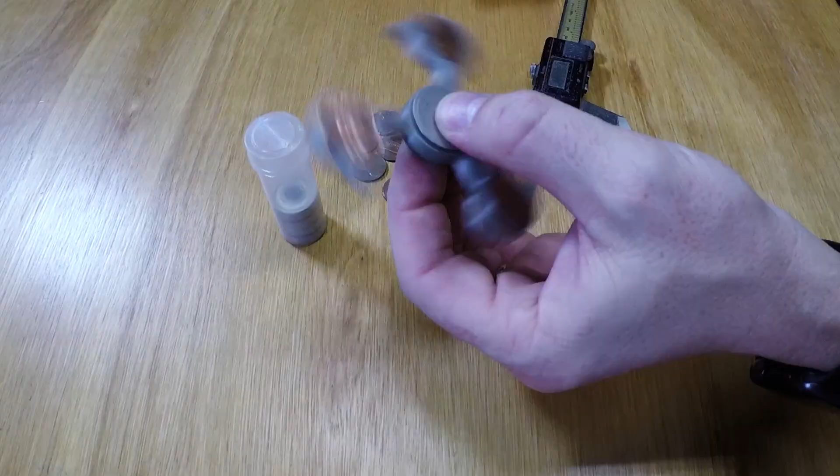And this definitely has that vibe to it because this fidget spinner right here is using coins. It uses 5 pennies in each arm for the weights. So it's not bearings and it's not nuts, it's coins. Pennies. I know not everybody has pennies, but you can use any coin if you want. It's just interesting. So that's cool.

But the other thing are these caps. This cap right here is locked into each other. And I got this idea because of 3D printing technology itself. 3D printing layers plastic, and there's those tiny little spaces in between the layers. And if one layer is stuck in the space of another layer, then it's almost like it is locked into place. Let me show you.

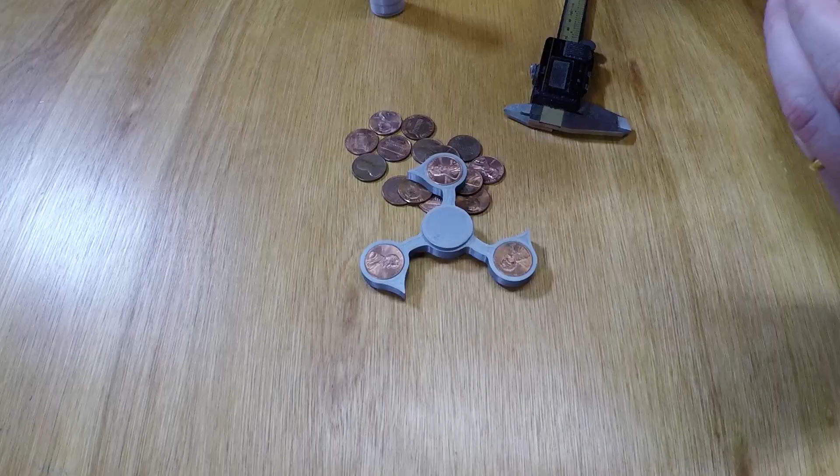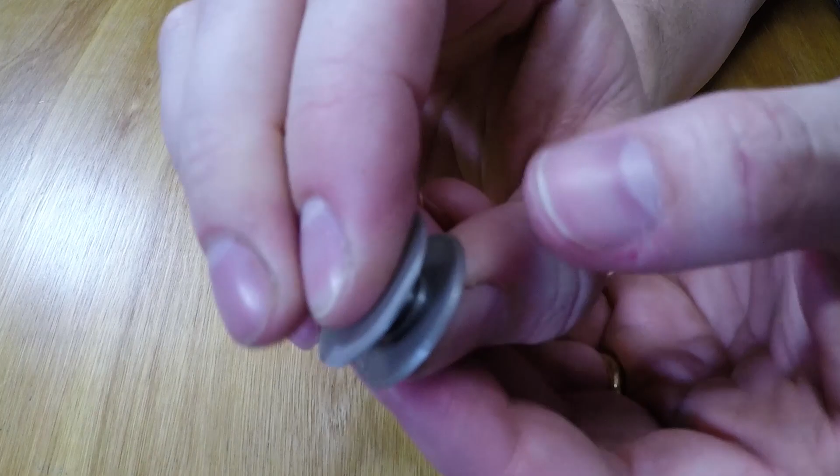So here are these two pieces. One has an innie and one's an outie, just like belly buttons. But because they're printed like this on the build plate, they have these tiny little layer inconsistencies. And if you put them together, you could almost hear it. There we go. And look, they are locked into place. This is not coming out easily.

And it's using this principle to put a cap on either side of this spinner, locking the cap through the bearing itself. It doesn't make for a better spinner, but it's a really cool thing that you can now apply to other things. You could technically make 2 pieces, one has a little hole and one has a little outie, and then when you put them together, they lock together. That's hopefully what you take from this, and you aren't necessarily using this to build another fidget spinner.

At the same time, I'm not going to judge you if you're building another fidget spinner because, I mean, I just built another fidget spinner, but it's all a ways to a means to an end, or whatever that saying is. So here's what I need to do: I need to show you how to make this in Fusion 360.

Making the fidget spinner itself with the coins is pretty easy. It follows the same tutorial as the bearings itself. You just stack them in there, and because they're kind of all squished into place, they don't fall out. That's what that is. But regardless, let's do this, and let's show you how to make some cool stuff in Fusion. I'm gonna kind of rush through creating the fidget spinner with the coins because it's very similar to the tutorial I did to use the bearings. So let's just get started with that.

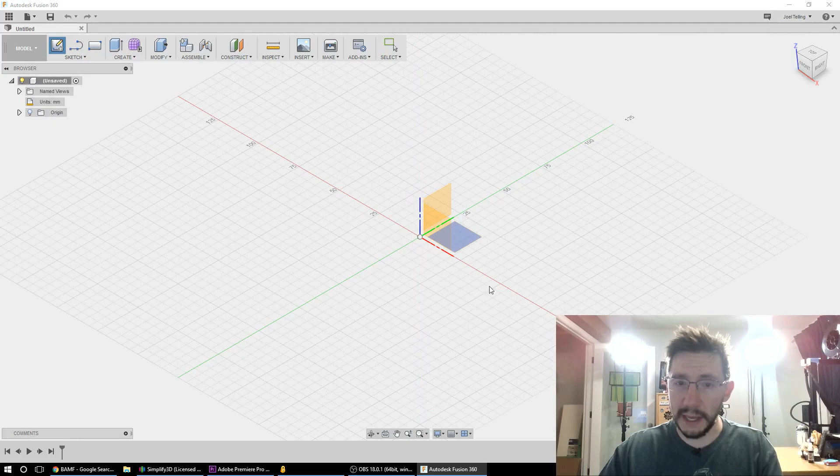I'm gonna create a sketch on this plane. I'm going to hit C for circle, drag it out, and do 22.02, which is the size of the diameter of the bearing, the 608ZZ bearing, with a little bit of wiggle room there. I'm going to select the circle, hit O for offset, hit 2, and enter. That gives me another circle around that one, which is the border around it. Now up here, I'll drag out a circle.

For the pennies, it was between 19.02 and 19.04 that I measured out, so I'm going to do 19.02. And you can probably guess what I'm going to do here: I'm going to select this circle, hit O, hit 2, and enter. That offsets it by 2.

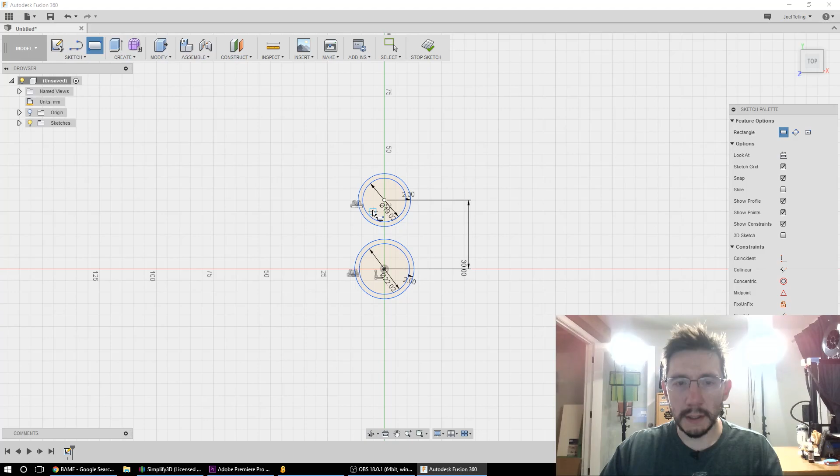So now what I want to do is put a dimension of distance between this center and this center. I'm going to hit D, select this circle and this circle, and bring it out. I don't want it to be too far away, so how about 30 millimeters. That'll be easy. I'm going to do a 2-point rectangle, go up here, and drag it out like that, and that's easy. So essentially, just like in the previous tutorials, this is all we needed to do to create the fidget spinner itself.

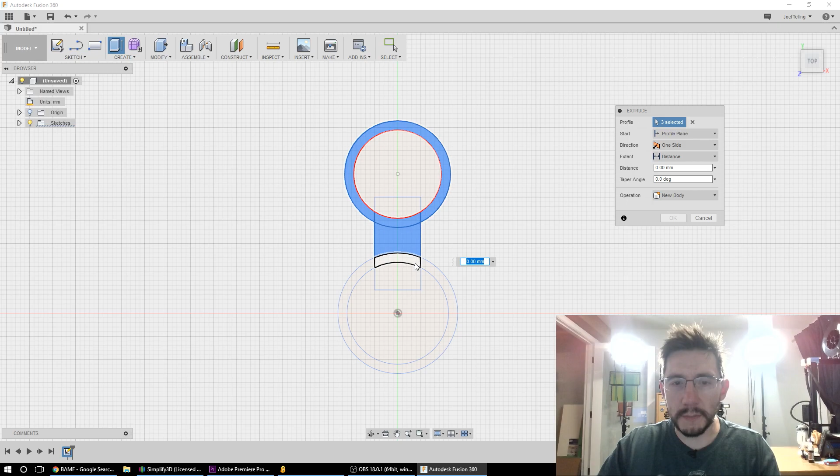To finish that off, I'm going to hit E for extrude, select the pieces that I want to extrude, and hit 7 for 7 millimeters. Then I'm going to go up here to create pattern, circular pattern. It's going to be rotating bodies, so I'm going to select this body, and the axis is going to be the blue one, the Z axis. I'll click that. There's 3. I'm going to hit OK.

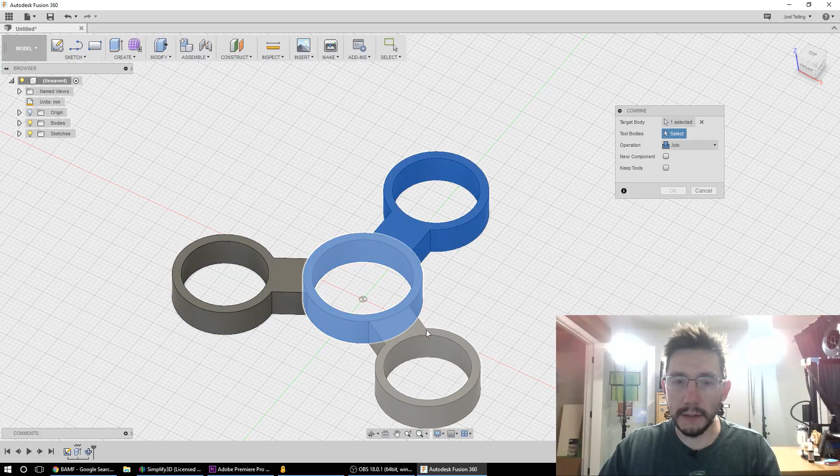There they are. I'm going to select Modify, Combine, and pick the elements that need to be combined into one body, and hit OK. There we go.

That right there is a fidget spinner with holes sized for the coins. Now for the caps though, this is where it gets kind of interesting.

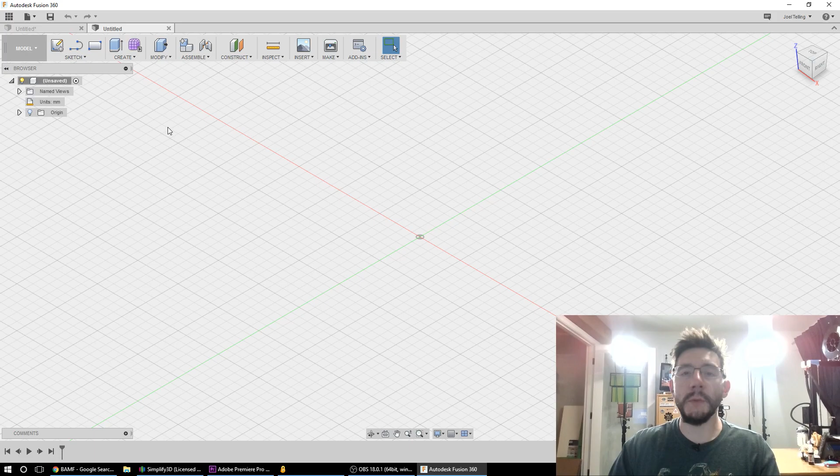I'm going to create a new document. For the caps, we're going to create pieces that go into each other. Here's how: sketch, create sketch, same axis, hit C for circle, drag it out, and do 22 millimeters. That's going to be the diameter of the cap itself.

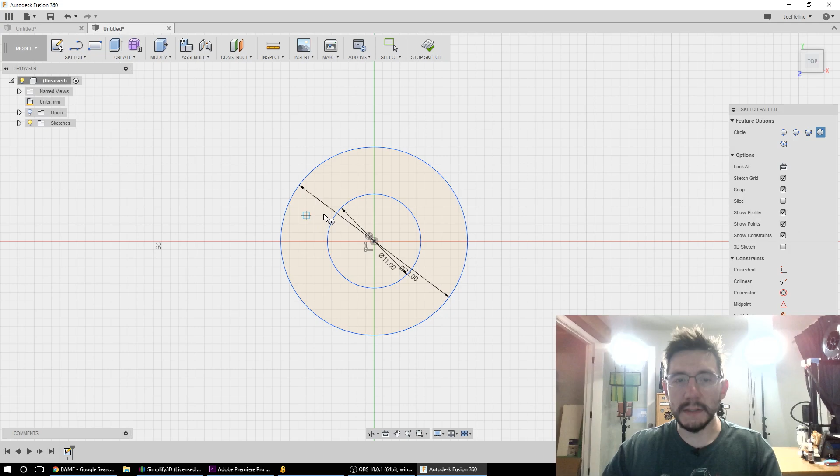Let's zoom in. C for circle, drag it out, I'll do 11 because that's the size of the inner part of the bearing, the inner race. Hit C for circle again, go to the center, drag it out, and hit 8 millimeters for the inner diameter of the bearing race itself. Then hit C, drag it out, and do 4 millimeters.

So here in Fusion we've got 4 concentric circles: one that is 22 millimeters, one that is 11, one that is 8, and one that is 4. One last thing before we're out of here, we need to make a copy of this. Select it all, hit Control C, Control V, and drag it over.

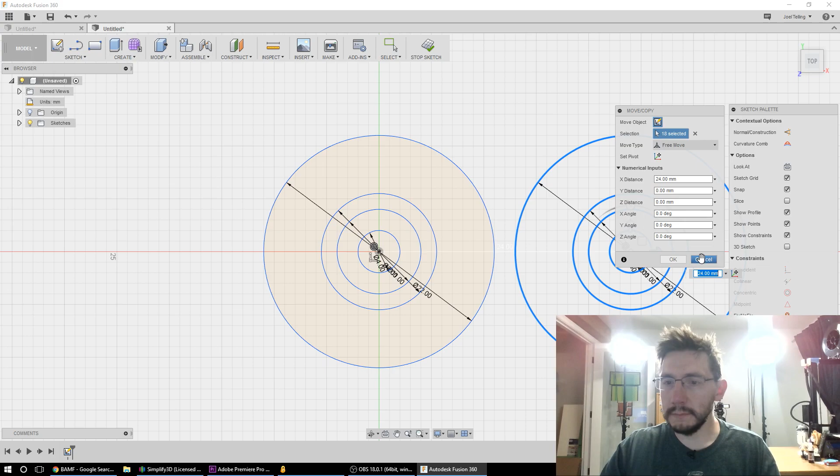That's it, that's all there is to it. So now we've got 2 copies. We can stop the sketch. They're very similar except for the 2 inner parts.

So we can take this one and this one, hit E for extrude, and type 1 millimeter. I'm just going to make the pad itself a millimeter thick.

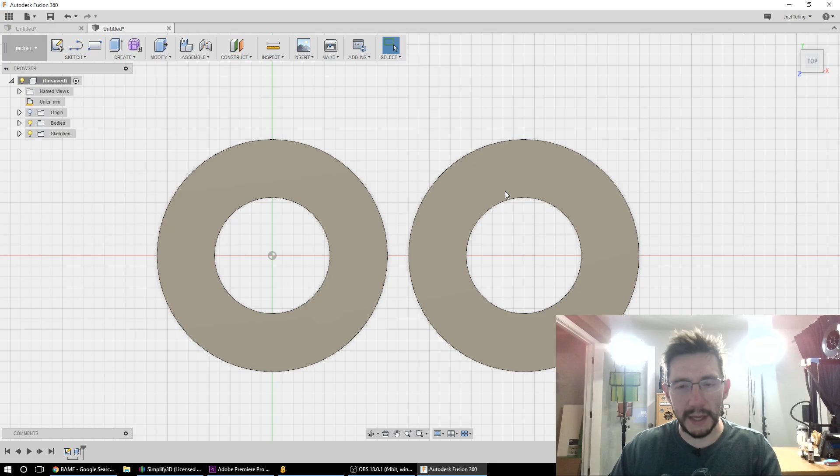No big deal, now I need to bring back that sketch. I'll select this one, hold down Shift, select this one. Hit E for extrude, and type in 2 millimeters because this is the part that rests on top of the inner race itself.

This is where it gets different. So this one here and this one here, there we go. This one over here is going to fit inside of this one over here.

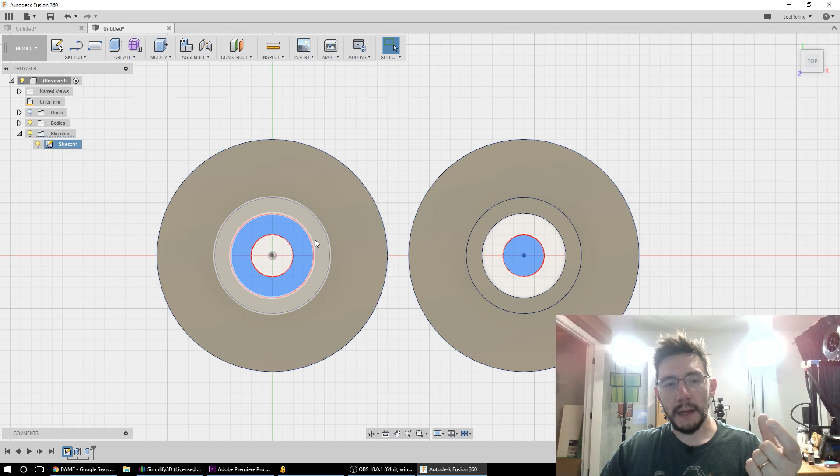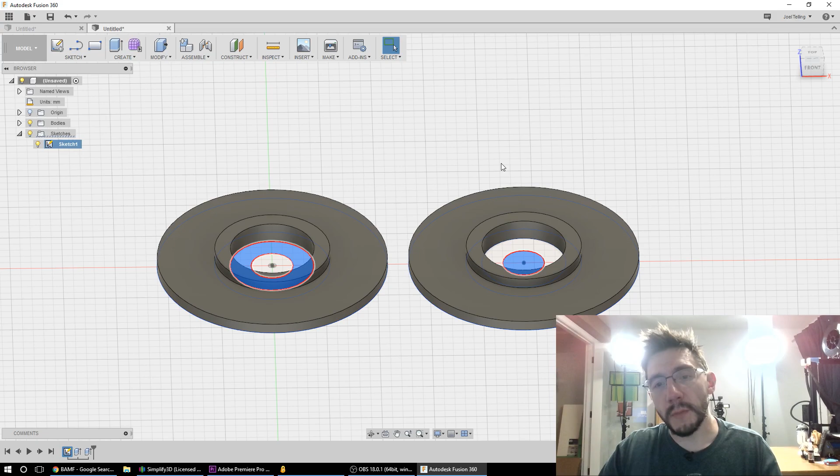The bearing itself is 7 millimeters in depth, so I think having these be 5 millimeters deep each, so that they can intersect, is good. But since this is doing it from the plane, we need to make sure it's 5 millimeters above this part. So this is 1, but this is 2, so it needs to be 5 more than this, meaning we actually need 7. Let's hit E and go 7, hit enter.

Oh, that was easy. All right, one more thing: this and this. These are the parts that are different from each other. Just select them, hit E for extrude, and do 1 millimeter. That's it. Okay, so now we've got these 2 caps.

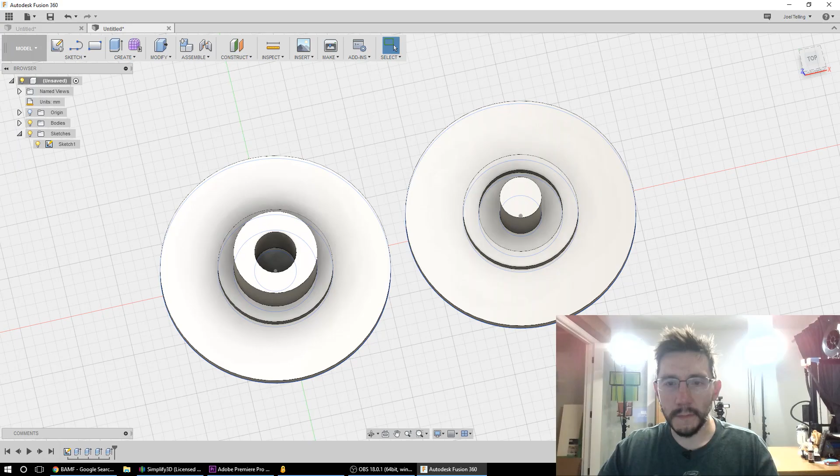These are super easy to do, and they rest on top of the inner race, and they interlock with each other.

The only thing I'd suggest at this point is to do a fillet on the pieces that intersect, to make it a little bit easier. Select, go up to create, modify, fillet, or hit F. I'll select this, select this, and type in 1. Ooh, 1 is a little too much.

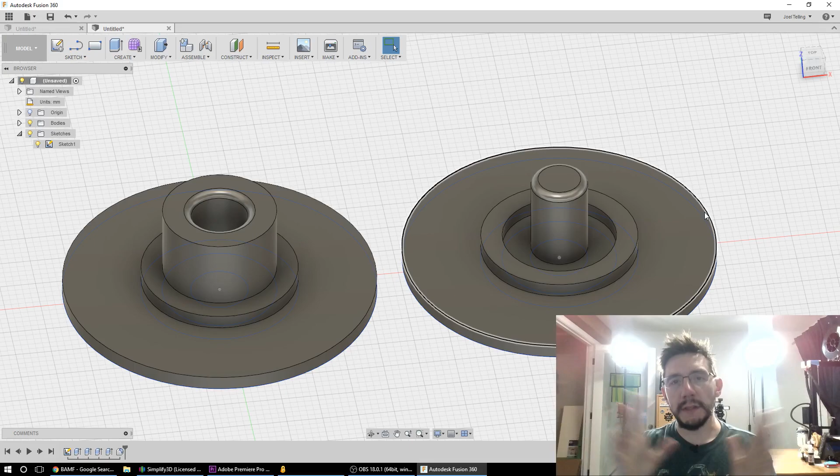So Control Z, F for fillet, this edge, I'll type in 0.5. That's a little bit better. Those should slide into each other easily, and the action of being a layered technology, where the layers can interact and kind of lock into each other, will aid us.

So let's print this out and let's put it together.

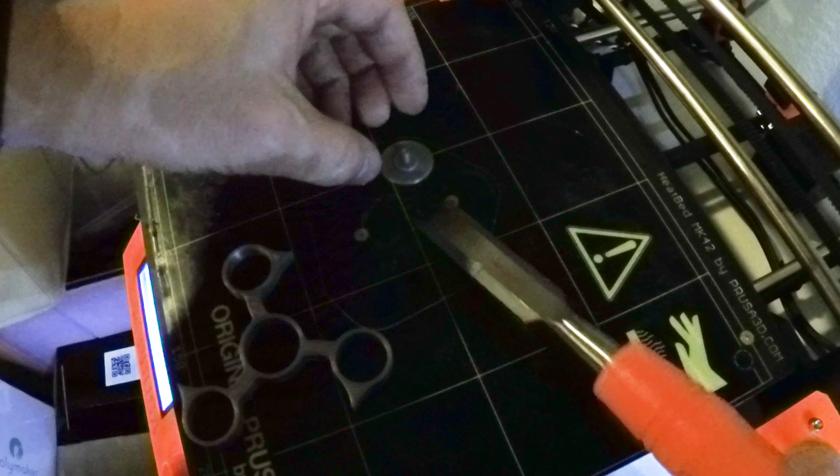All right, the print was awesome. It came off the bed fairly easily. What I like to do is hit it on the side with the sharp end of a chisel. This way I don't dig into the PEI sheet on top of the build plate, but it knocks it hard enough to initially separate it from the PEI.

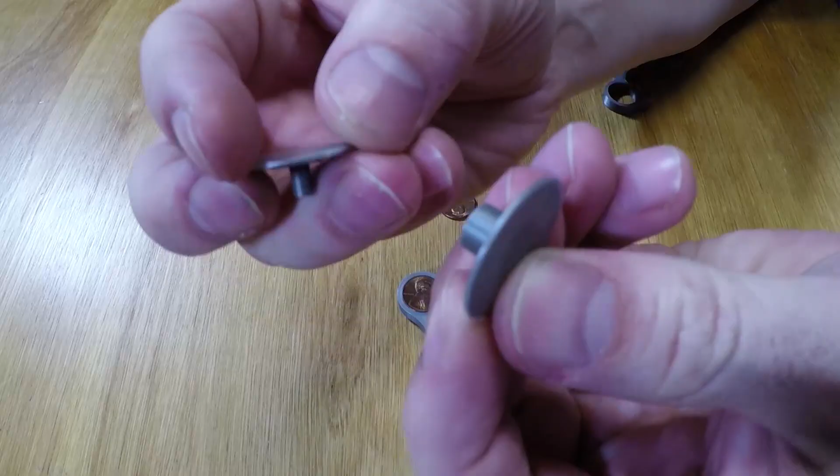I do use a little glue stick on my PEI, don't judge me. Now that we have all this stuff, we need to put it together. There's the caps - here, I'll show you. You can tell these are longer than the previous ones, and they should lock in great. But first, we need to load our spinner with a bearing.

I just happen to have some bearings right here. This one will do nicely. These are just standard bearings on Amazon, I got these pretty cheap. I'll put the link in the description so you can pick up your own. If you know your bearings well, let me know if there's a way to make these spin faster. The ceramic bearings themselves are like 10 bucks a piece.

So put this right here. It's nice and snug. Here we go. This should fix it. That worked. So now we've got a spinner with a bearing and it spins, but it needs the weights on either side.

So find some pennies. 1, 2, I think it's 5. Five pennies are what take up the space.

So what we can do is take the first one and push it down, then the second one, push down, then the third one, push down. There's the fourth, and then the fifth one right at the top - it's almost there. It's really just an excuse to use the mallet.

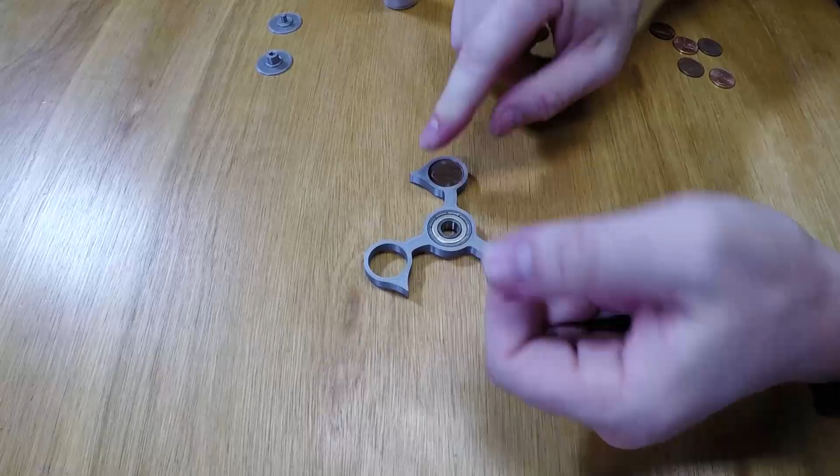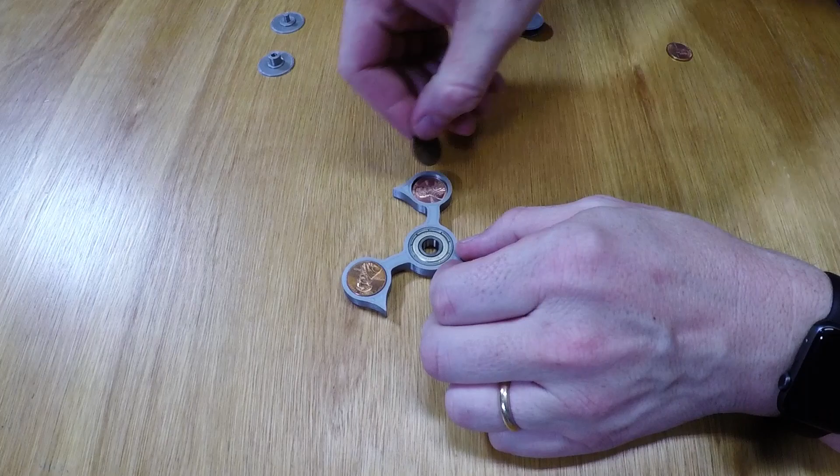1, 2, 3, 4, 5. Good. All right, there's 1, there's 2, 3, 4, 5. Last one, last one. All right. 1, 2, 3. We'll put the tarnished penny below, and we'll have the nice shiny penny right on top. 5.

There we go. It spins pretty good, not too bad.

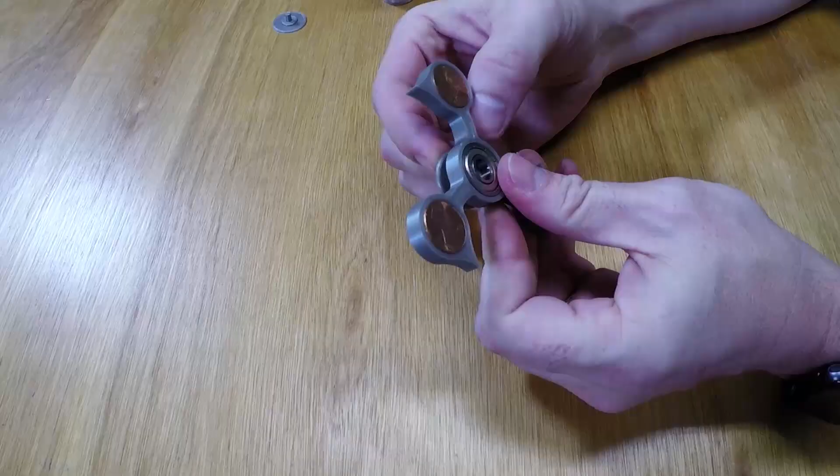Now for the caps, this one should slide in fairly easily. Easy enough, so it's got that space right there. And here's what I want to do - I want to put this one and have it intersect with that space, and then I want to push it down. Just like that.

That's it, that's it. We now have ourselves a spinner that actually has 5 pennies in each arm, and it spins. That's great. What's really cool about this is there are some designs where it has a bottom so the coins don't fall out, but if they're snugged in really well, they're not going to go anywhere.

And if you're tired of it, I believe you can take the pennies out. All right, that's it right here. I hope this is cool. I really like the idea of being able to 3D print something that interlocks with another thing that 3D prints. Plus, the fact that it's a layered technology means the irregularities in the layers lock together, and it provides a really cool thing.

So what if you design a case for your Raspberry Pi and it's in 2 halves? Well, rather than using screws to hold it together, you can use this method to make something that actually uses the 3D print itself to lock together.

Well, if you're telling me, Joel, I want to get that apart - I think if you're gentle and careful, you might be able to. Maybe not, I'm not going to risk it. I'm not going to take it apart. I don't think it wants to come apart. Maybe. Oh, you totally want me to do this, aren't you?